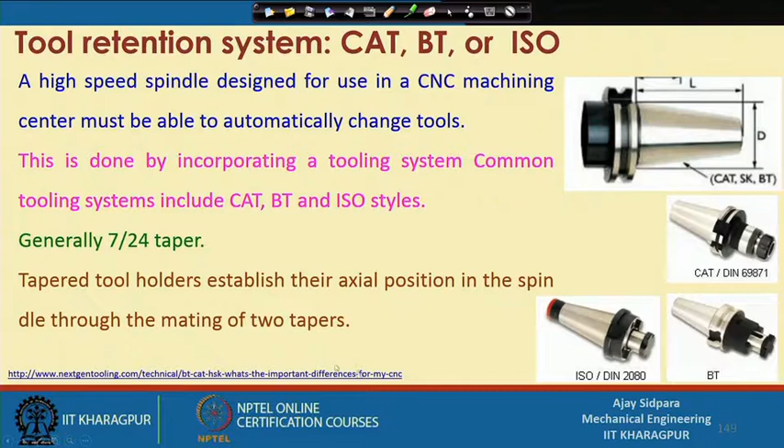So these are the things. Let us see what problems are associated with these particular standards, so that we cannot use them for micro machining applications.

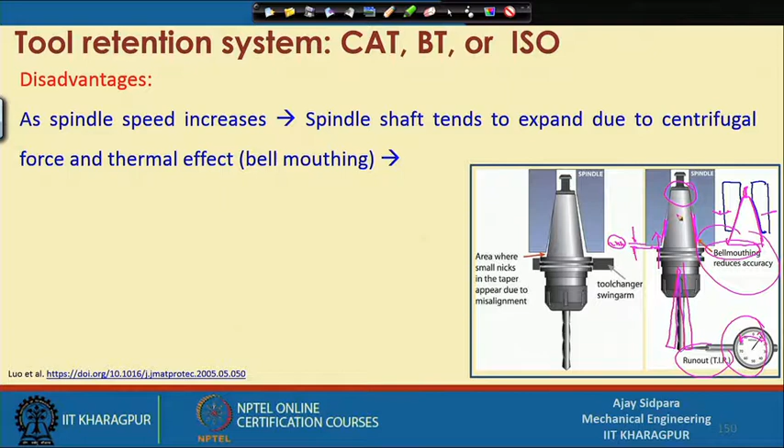Now your thing will be something like this. If you check the total indicator run out, the dial will move in this direction and that direction, and because of that, you will get a run out — a bell mouthing type of problem, due to this expansion.

Now, the taper of the tool holder is drawn further into the spindle, because the drawbar is continuously holding this thing in this direction, in a pulling condition. So if you are getting this part, because of this pull, your tool will go further inside. So this is the actual position.

After that, it will shift a little bit inside. So now this is your position — it is touching and clearing this gap, this face is touching now. So whatever this gap is, that much amount in Z is going inside, and you are not accounting for this in the machining.

So what is happening here: suppose this is your workpiece and these are the features you want to cut, and consider this dimension is 500 micron depth, and you are cutting a slot out of it. When this happens, what you actually want is for your cutting tool to reach this location, but because the holder is going further into the spindle, your tool is actually reaching a different location.

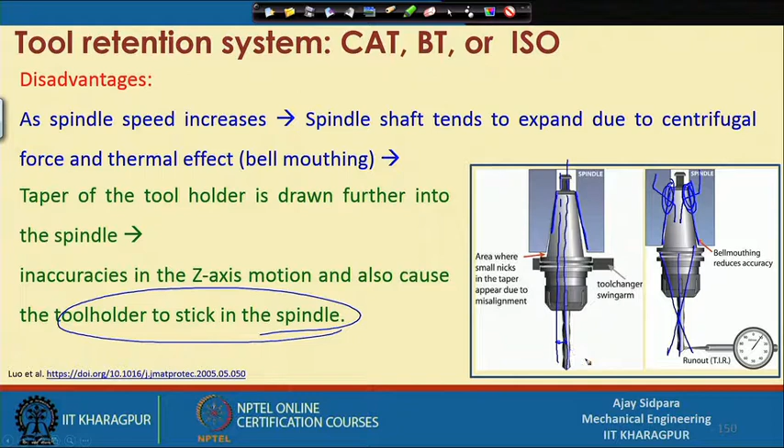So now the whole thing is shifted here. In this direction mostly you will get a tool alignment like this, but here this is the axis of the spindle and this is the axis of the tool. So now this is the parallel offset, or consider the incline offset.

Because of that, if this is the condition and you continue machining with this, and by chance it is sustained, so you want to get a dimension of this diameter. Consider 500 micron is the diameter, but now you can see that the tool is shifted to this location, because this dimension was calculated considering that the axis of the tool holder and the axis of the spindle shaft both coincide, but that is not happening here. So instead of 500 micron, you get something bigger than that.

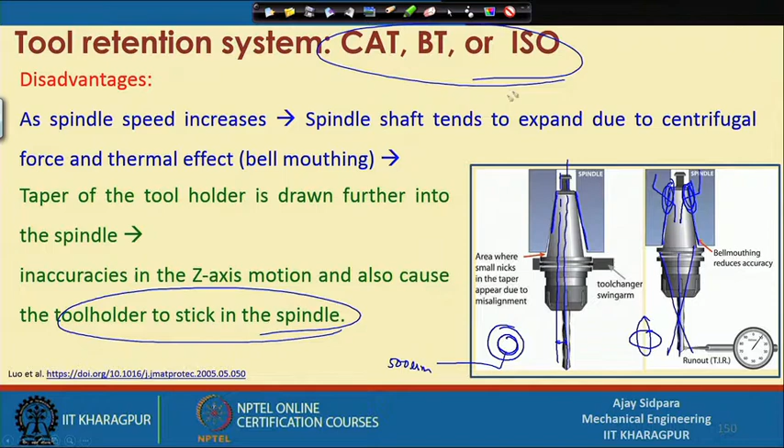In this particular case, mostly you will get an oval shape of hole, which creates more problem. So either way, ultimately you are not getting the part as per your dimension. So this is the problem with the CAT BT or ISO type of standard.

So now there is a system called HSK. It is comparatively new compared to the ISO standard we discussed just before. A new DIN and ISO tooling standard has been developed with particular application for high speed, known as HSK.

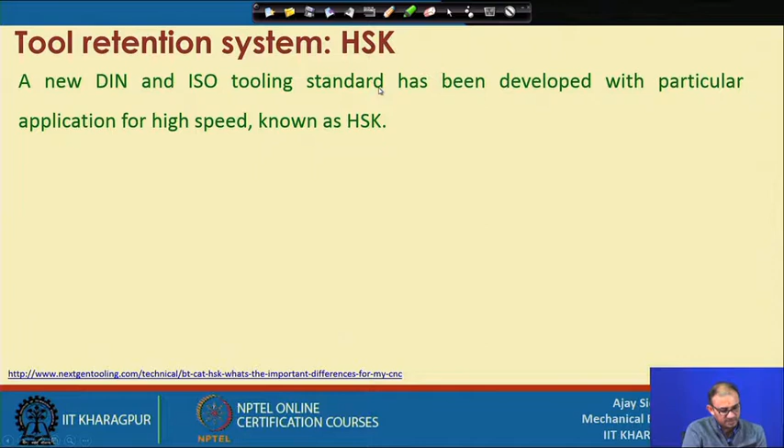It is called hollow shaft, hollow shank shaft, something like that. It is a German name, but it is considered that the shaft is hollow, a hollow shank shaft. So this is the system.

Now you can compare these both and see how they are different from the earlier case. First, you can see this much dimension is not present, so it is almost half the length of the conventional CAT, BT, or SK standard. Other than that, the taper is also very less here.

If you consider both, the taper is less, and there are some things which are very important or different compared to this part, in that it has a different type of contact surfaces, not only one contact surface. So let us see what things are there.

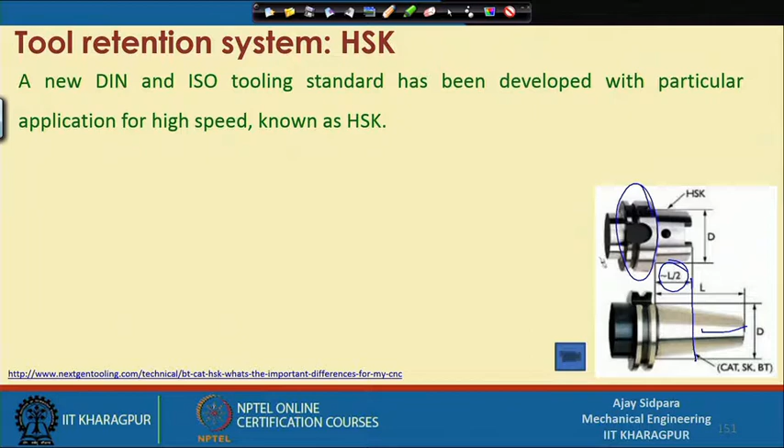It is particularly used for high speed spindles in high precision machining centers, and HSK tool holders are retained in the spindle by a set of internal grippers located inside the spindle. Let me show you that video.

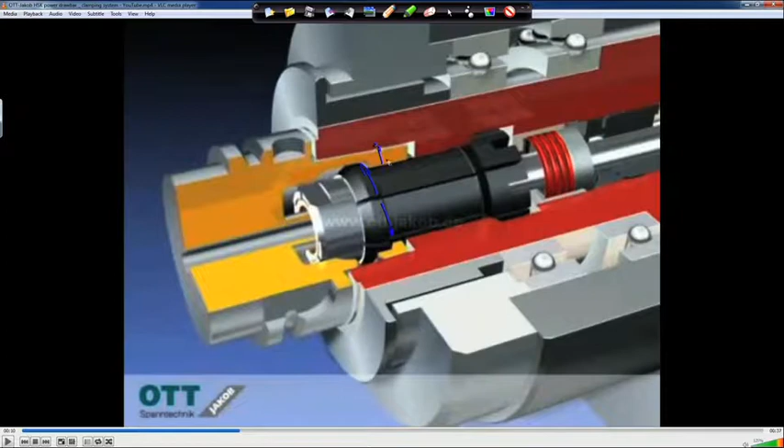So it has a contact here, this is the one contact, and not only pushing—after pushing, it is actually drawing inside. So you will get another contact here. It has a dual contact.

This HSK has a dual contact, and that is the advantage: even if there is some type of misalignment, the tool holder will not penetrate inside, because it has contact with the face also. So this face contact will not allow it to go inside.

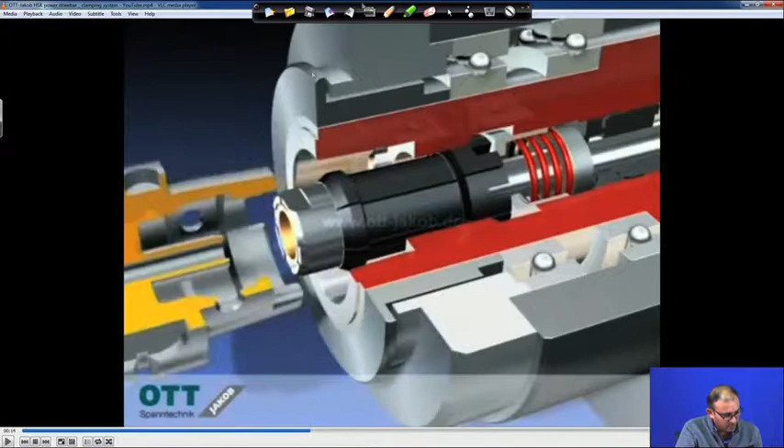So it is going down. When it is moving, it is compressing, and at that time you can remove this particular part away. Then again, first it is going inside and then expanding, so you get a perfect connection between the two parts. This is the mechanism by which you are putting it together.

So it is either pneumatically operated or hydraulically operated, so that you can easily get the displacement required without any problem.

Now this is what it is doing. When it is pushing down, this particular thing is actually getting compressed. Once compressed, you can remove this thing away from the system, and then it is pulling back again.

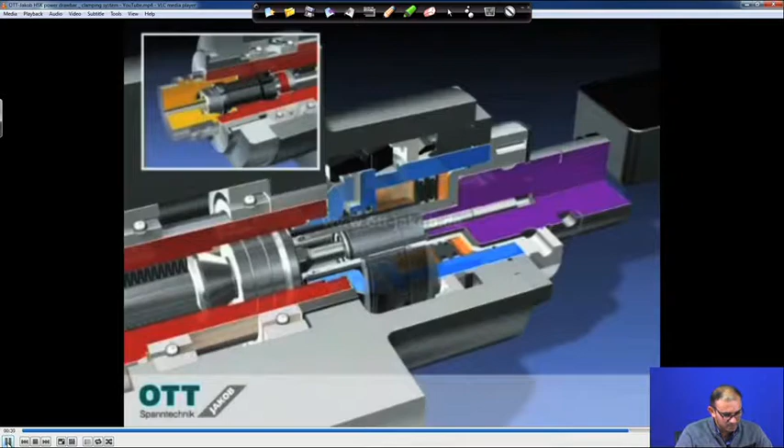At that time it is pulling this tool holder also, and after pulling it will expand, so it will touch the surface of the spindle system. This way, you can get this thing done.

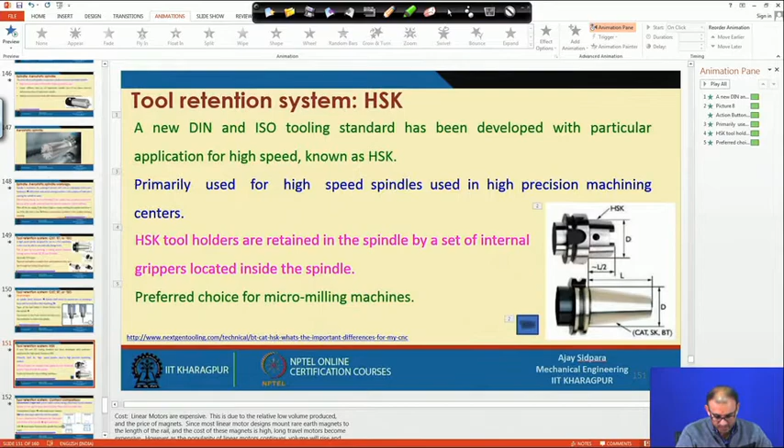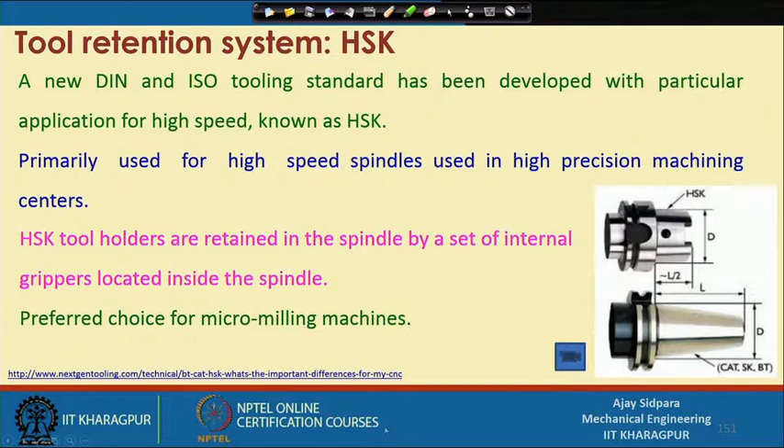Let us see how this is important, which way it will create a good joint. It is because of this internal gripper that you get good acceptance in micro milling machines. Now compared to contact, let us see how the contact happens, that is what is important.

Now these are the things between the V flange and the HSK spindle. You can see, as we saw in that animation, it has two contacts here—this is one contact and this is the other—but in this particular case, we know that this stud will be pulled by this drawbar.

So when it is pulling back, you have to create a gap, which is mostly considered a 3 millimeter gap between the spindle and the V flange. Because if that gap is not there, then this pulling has actually no effect. By chance, if this thing is coming into contact first, before it matches this particular taper, then you will get a wobbling motion in this direction and that direction. So this gap will ensure full contact all over the taper direction. That is the advantage of keeping this gap.

But this 3 millimeter gap will create a problem, because when this thing expands, this gap tries to reduce, and the whole system goes inside. So the conventional V-taper tool system makes contact along the fixed taper by a drawbar. Approximately a 3 millimeter gap between the tool holder flange and the spindle face is given here, so it only makes a taper contact. That is the problem here, it is a contact at the taper only, and that is creating the problem.

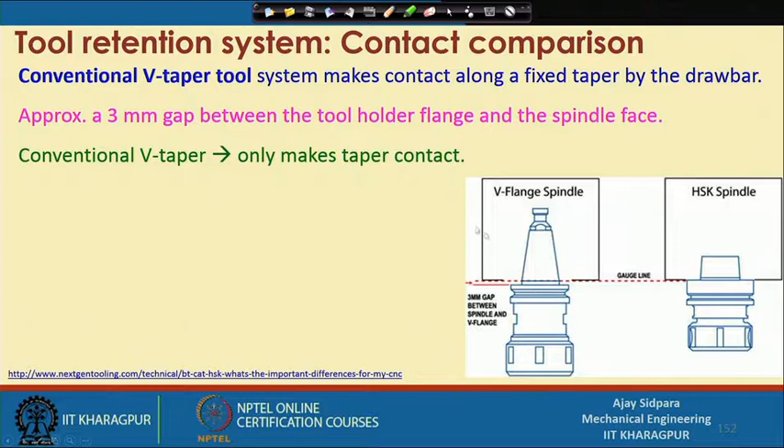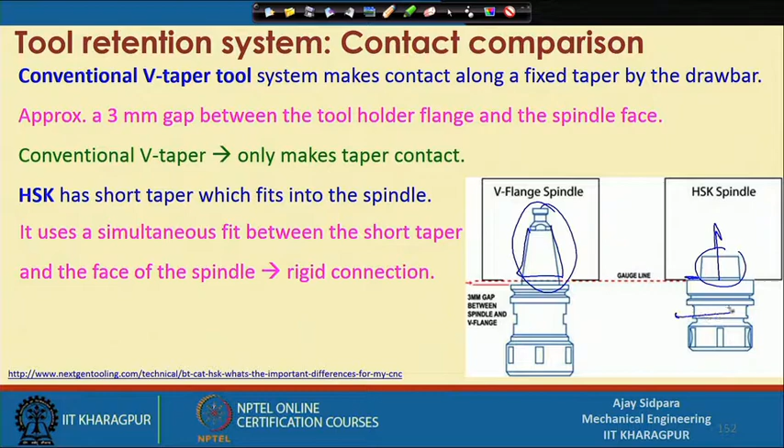But HSK is the short taper which fits into the spindle. This is the only thing which is going inside the spindle, and you can see it is a very small amount of mass which is going inside. So it uses a simultaneous fit between the shorter taper and the face of the spindle. Because of that, you get a rigid connection, so now it will not move in any direction. It will not go into this direction also, because this face will prevent that motion, and since it is also perfectly aligned, it will not move in that direction either.

So in radial direction or axial direction, you will not get any type of movement. It has a dual contact between the spindle face and the taper. That is the difference: here you only get a taper contact, but here you have both face contact and taper contact.

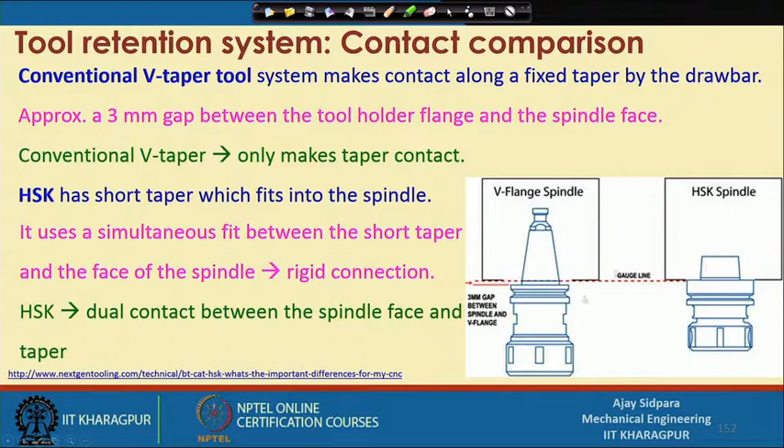Now, how can you compare the drawbar mechanism, the way your drawbar is holding this part? Our conventional holders are held into the spindle by drawbar fingers that wrap around the outside of the retention knob and pull stud. So your drawbar mechanism is located at this location. When clamping is done, this whole thing actually moves inside the system, and because of that movement, you get contact with the spindle face here. So these two surfaces are the contact surfaces.

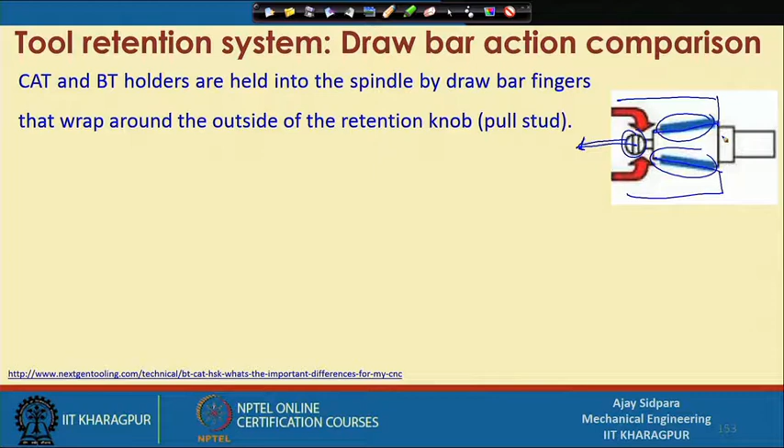HSK is a different thing. We have seen that it is not pulling from any side. First, the gripper actually goes inside, then it pulls, and then it expands. So it has an internal gripper here, whereas the other system has an external gripper, because it is pulling through a stud located outside of the part. Here, what is happening is that it goes inside this part, and then after going inside, it expands outward.

So it is called the hollow shank, that is where the name comes from: hollow shank shaft, the HSK part. So it is a finger which reaches inside the hollow shank, and because of that, you get a merry-go-round effect in the drawbar.

Consider that you have a mass here, and this is the string. So this is the mass, and now you rotate this thing. When you rotate it, this whole thing actually goes outward in dimension, because this thing will move outward depending on the RPM, and then it will go further away. So that is called the merry-go-round effect.

But the merry-go-round effect is very good in this particular case, because it is actually drawing from inside. This word is important, because if it is going in a merry-go-round, then your contact here is an inside contact. The advantage is that whatever RPM you are rotating at, your contact will actually further stick to the surface, it will not expand. But here things are exactly different.

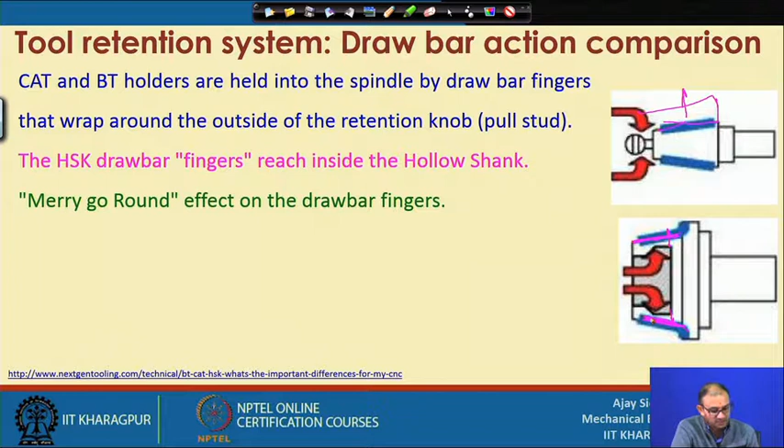Whatever things are here, so this is your spindle part. If this thing is expanding, then what happens is you will get a loose connection. But here, if it is expanding, you will get a stronger connection. So that is the big advantage of this thing. This means the higher speed you go, the more it will firmly grip with the surface. That is the advantage, and that is called the merry-go-round effect in the drawbar fingers.

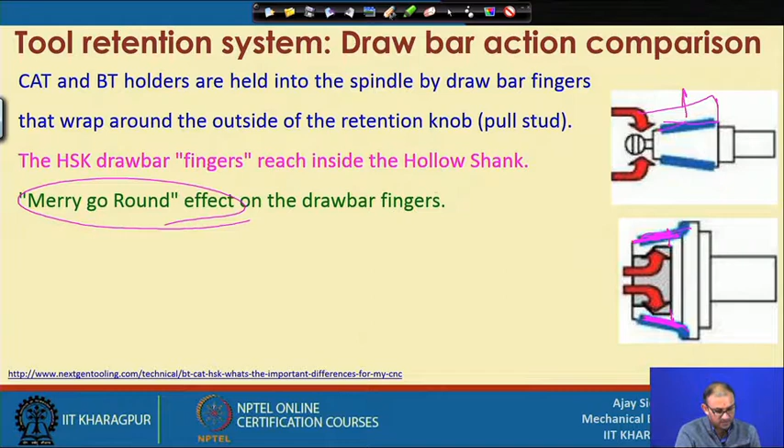So as RPM is increased on the HSK tool holder, the drawbar fingers become a tighter connection on the inside of the flange and increase the pressure onto the spindle connection. So this is the advantage of using this particular part, because whenever you get a higher RPM, your drawbar will push this part, and whether it is centrifugal force action or thermal expansion, everything will make this thing more strong.

And here, those types of thermal expansion or centrifugal force will actually adversely affect the conventional tool holder. So that is the difference between these two different systems.

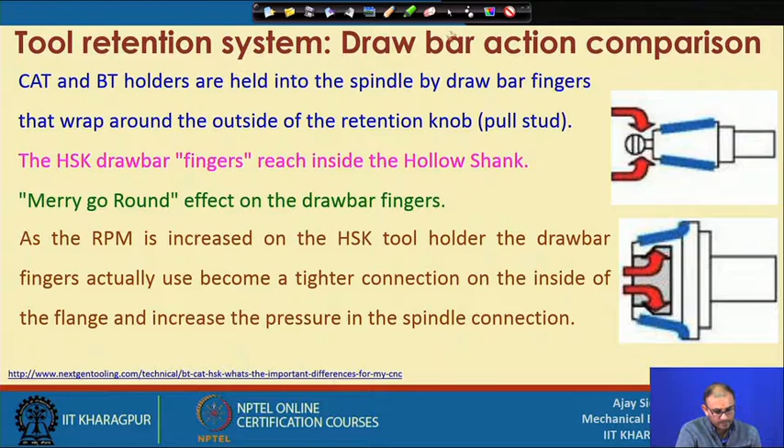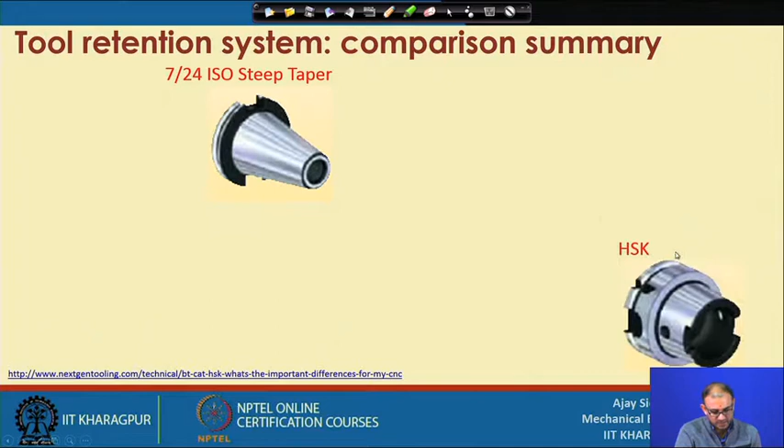So now, what is the comparison summary between these two systems? This is the taper ISO BT standard, whatever we are thinking, and this is the HSK tool holder. So the first thing is, this has one surface contact, and here you get dual surface contact. That is the big advantage.

Low axial accuracy, because now we know that we are getting a shifting in the Z direction. Whatever problem is caused by this misalignment will mostly be reflected in the Z direction, and if you compensate in the Z direction, it will again create a problem in both the X and Y directions. But here, you get higher axial and radial accuracy because you have dual contact on two surfaces.

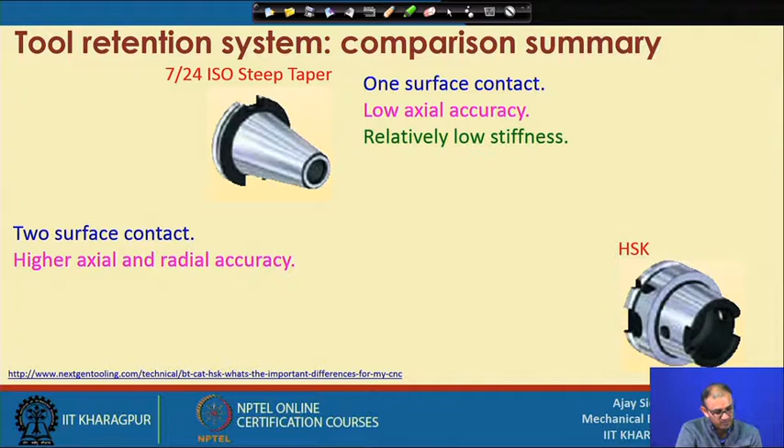Relatively low stiffness here, because whenever you put a load in the axial or radial direction, the problem is that you get deflection, because the contact here is only friction contact, and that is also on one surface only. So because of that, you will not get high stiffness in this part.

So here you get higher stiffness, because it has both static and dynamic stiffness high compared to this particular system. Not suitable for high speed, because it has outside clamping, as we just discussed.

Whenever there is outside clamping, at high speed the centrifugal force and thermal expansion both adversely affect it. But this thing is actually suitable for high speed because it has inside clamping. This inside clamping will make your system more and more strong when it is rotating at high RPM.

Another thing is the large mass in the stock. That is also creating a problem, because you have to remove this particular thing very quickly, and you also need higher speed, because when your mass is high and it is rotating at high RPM, it also creates a problem.

And every time, you have to provide a larger amount of stroke here, because when your automatic tool changer is removing things and putting something different, it has to pass through a very large distance in the Z direction. But that is not the case here, because we have seen in that figure that the length is almost half the length of the normal conventional part. So you can actually get faster change as well as higher speed, both possible in the HSK tool holder.

Another problem here is the possible run out due to taper fitment, because when making this, you have to make sure that the machine spindle taper exactly matches the tool holder taper. If those things are not matching, even a fraction of a micron here and there, it will directly create run out on the tool.

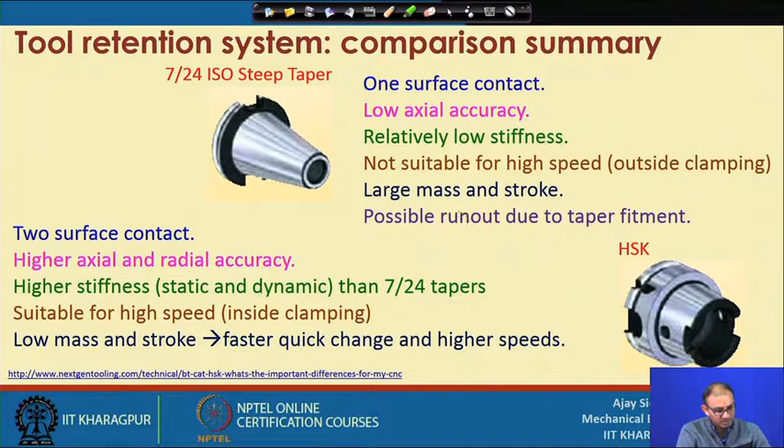Because the first thing is, we have three connections, from spindle to tool holder and tool holder to tool, as we have seen. If any of these connections are not making a perfect fit, you will get run out everywhere. So these are the differences between the two systems, and mostly because of these particular differences, we can think that HSK is the best suitable system for this particular application in micro machining.

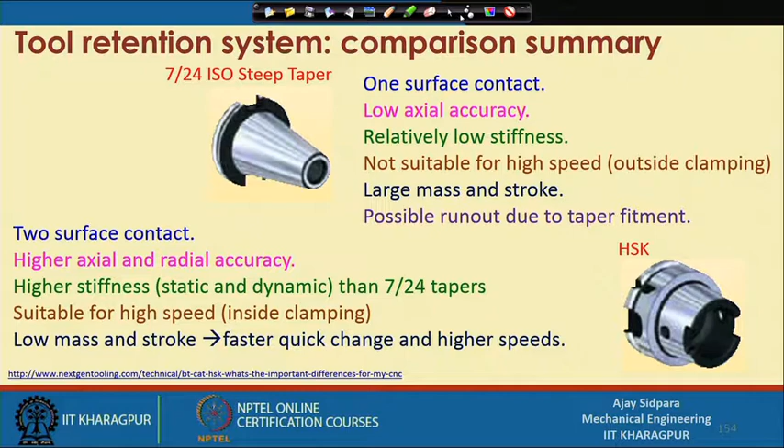This optimizes the clamping force dissipation, interference speed, and provides higher stiffness. This is mostly used when doing very high speed machining under high load, meaning when machining hard material with a high depth of cut - an aggressive machining application. HSK is still useful and fulfilling all our requirements for micro machining, but this slide is showing that besides the two surface options, three surface contact holders are also available.

Now, what are the advantages here? With a 3 surface contact, we know that the more surface contact, the stiffer it becomes. So here it has very high static and dynamic stiffness, because now you do not have any chance of moving in x, y or any z direction.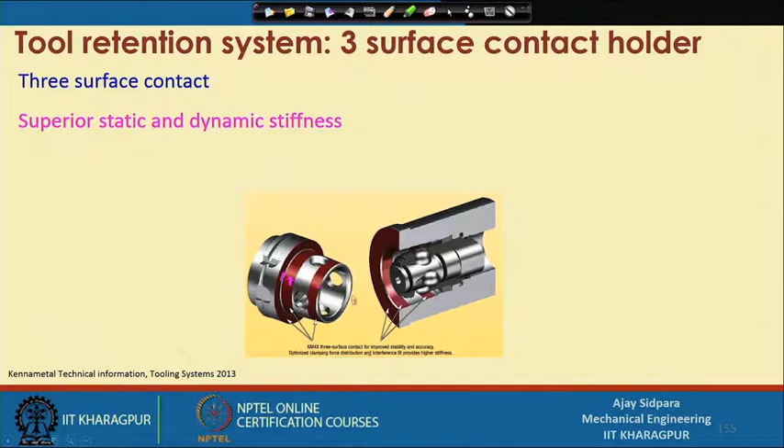Now, if you see this particular chart, it is torque versus bending moment - that means how much torque you are providing and what is the bending of that particular tool holder. These are the different tool holders shown, and these are the different operations. If you see these particular things, they also give you many insights.

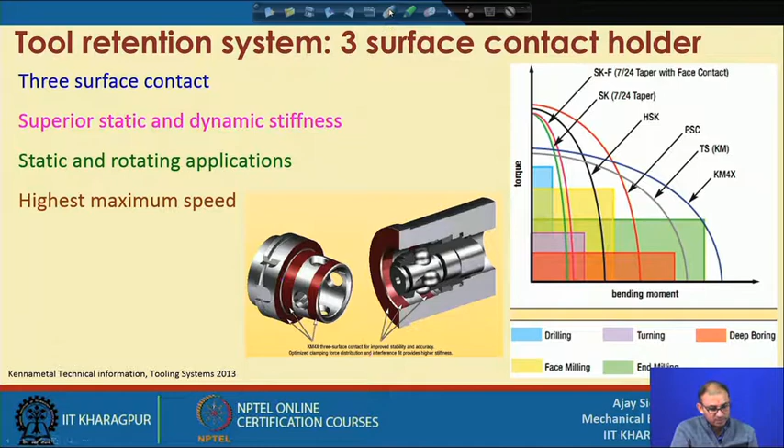Now if you see, this is the drilling area. In drilling you will not get bending at all, because we know that in drilling we are mostly just pushing into the material. So your torque requirement is very high, but you will not get bending at all.

But if you see this particular end milling operation, we know that in end milling we are pushing it down and then moving in a direction. So when your tool is going down, you get thrust force, and when you are moving, depending on your feed rate and depth of cut, you get a different bending moment. So end milling has the highest area in terms of bending moment.

What is important here is that whatever we are discussing is actually at this location - you can see it has a very large amount of area through which it is creating a bending moment, so it can sustain for a longer period of time. And these are mostly what we are talking about, the 7/24 taper with face contact. So it has a very small thing here, that is a small bending moment at this location.

So in our HSK, whatever we have discussed, it is folding at this location, but it is still useful because these are very customized parts, mostly used for high speed machining and very hard machining where the material hardness is very high. At that time you have to maintain the bending moment and stiffness in the machine tool. So this is the third contact.

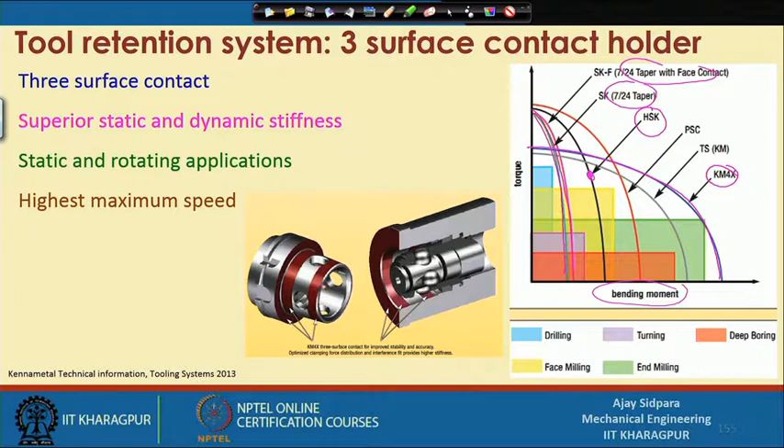Let me finish this lecture here, because our part related to the components of the machine tool is mostly over by this time. We will see what things we will discuss in the next class. Thank you very much.